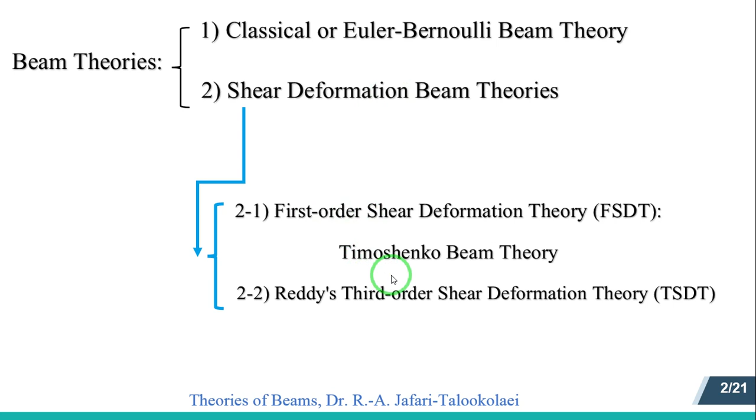Generally, one can classify beam theories into two categories. The first is classical or Euler-Bernoulli beam theory, sometimes called technical beam theory, and the second is the shear deformation theories of beams. There are several shear deformation theories of beams presented by many researchers, and in this video I'd like to talk about two well-known ones: first order shear deformation theory, FSDT, famous as the Timoshenko beam theory, and Reddy's third order shear deformation theory, TSDT. You can search the literature and find other shear deformation theories.

Let me talk about the general points in classifying beam theories. The bending effect, or bending moment effect, is a necessary part in the modeling of beams and has significant influence on the beam response, and it will never be ignored. Likewise, the transverse or vertical inertia has to be considered in the dynamic analysis of beams. In other words, the bending effect is necessary for static analysis of beams, and the bending effect along with the transverse inertia effect are necessary for dynamic and vibration analysis of beams.

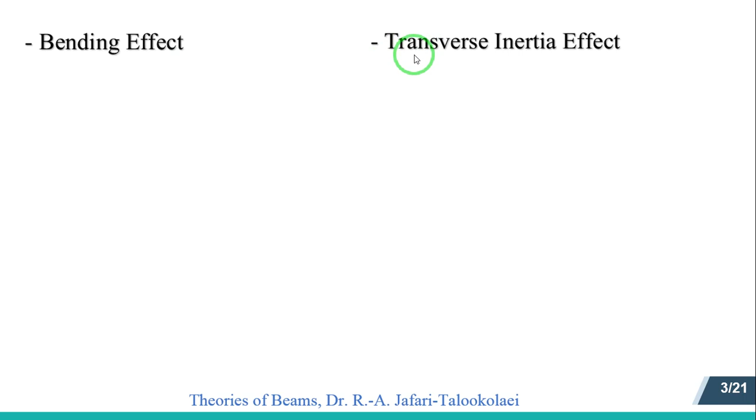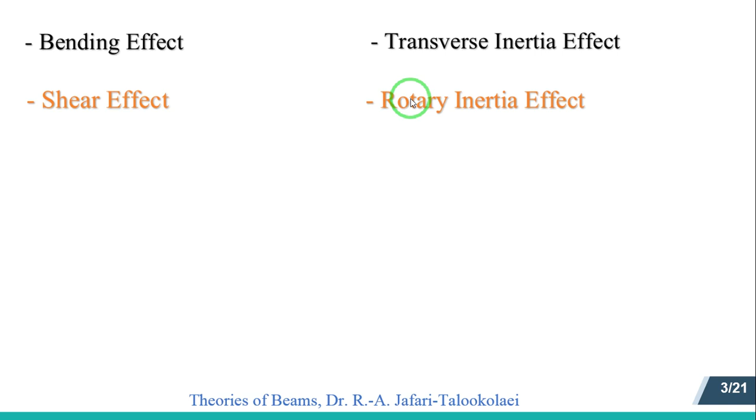There are two other effects that may have significant influence on the beam response: the shear effect, also called shear strain, shear stress, or shear force effect, and the rotary inertia effect. It can be shown that for a thin beam, meaning a beam with a high slenderness ratio L over H, the shear and rotary inertia effects are not significant and can be neglected. But for a thick beam, with a small slenderness ratio, the shear and rotary inertia effects are important and cannot be ignored.

Let me show this table. In this table, you can understand the differences between some theories of beams. In the Euler-Bernoulli beam theory, the shear effect and rotary inertia effect are ignored; only the bending effect and transverse inertia effect are considered. In the Rayleigh beam theory, only the rotary inertia effect is taken into account, and the shear effect is ignored. In the shear beam theory, the shear effect is considered, but rotary inertia is ignored. Finally, in the Timoshenko beam theory, both the shear effect and rotary inertia effect are considered in the analysis.

In the next slides, I will talk about classical or Euler-Bernoulli beam theory, first order shear deformation theory (FSDT), and Reddy's third order shear deformation theory (TSDT).

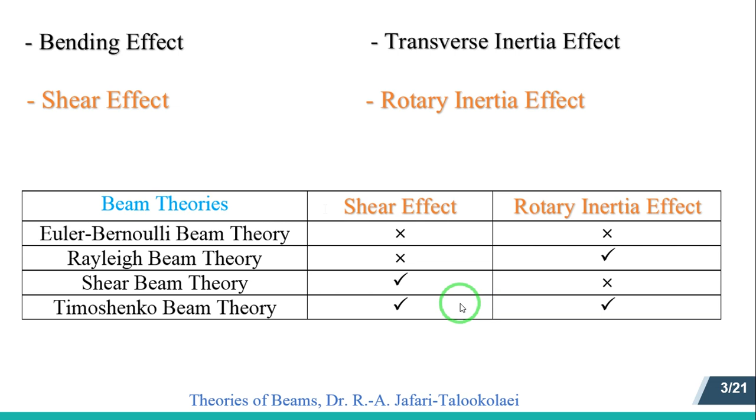In this slide, the left figure shows the beam's cross-section at an arbitrary position X before loading and deformation. The beam is placed in the XY plane in a right-handed coordinate system. The right figure depicts the beam's cross-section after loading and deformation, and the dashed dotted line signifies the midplane of the beam — shown here before deformation and here after deformation. Likewise, U0 of X and T and V0 of X and T are the displacement components of the midplane in the X and Y directions respectively.

The line OA is the tangential line to the deformed midplane, and OB is the line of the cross section. The partial derivative of V0 with respect to x is the slope of line OA to the deformed midplane.

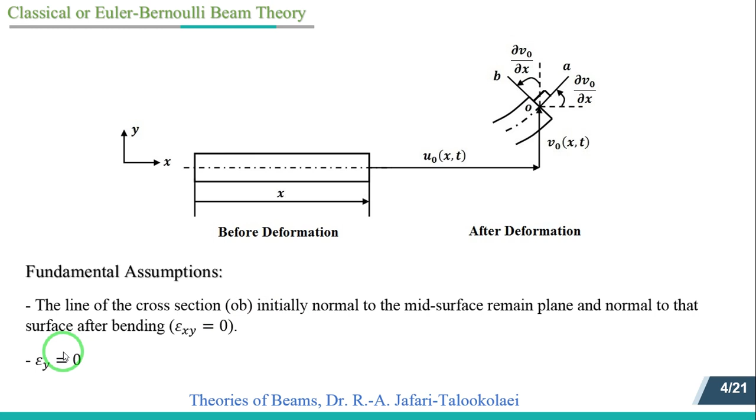The classical beam theory is based on some fundamental assumptions. One assumption is that the line of the cross section OB, initially normal or perpendicular to the mid surface, remains plane or straight and normal to that surface after bending. This assumption means that the vertical shear strain epsilon xy is negligible, which is compatible with ignoring the shear effect I emphasized before. Another assumption is that the stretching and compression of the beam in the thickness-wise direction can be neglected, meaning epsilon y equals 0.

The displacement field for the Euler-Bernoulli beam can be written as equation 1. In this equation, u of x, y, z, and t, v of x, y, z, and t, and w of x, y, z, and t are displacement components of an arbitrary point of the beam in the x, y, and z directions respectively. As you can see, it is usual to write the displacement fields based on the displacement components of the midplane, that is u0 and v0 in our problem.

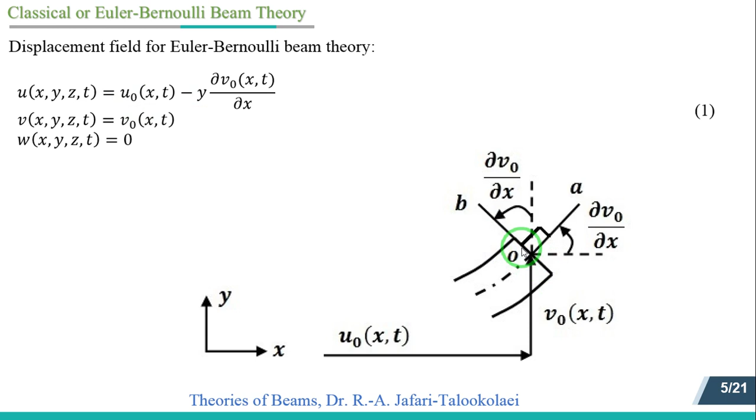Let me explain how to write this equation. Imagine a point above the midplane, a point with positive y. If you want to write its displacement in the x direction, for example, you can write it with respect to the midplane. So its displacement equals the midplane displacement, the first term on the right hand side of the first equation.

So you can say that its displacement equals midplane displacement plus the relative displacement between that point and midplane, both in the x direction. As can be seen, since the relative displacement is to the left, the minus of it is considered in the first equation, as you can see.

The second term of the displacement field, v equals v0, is obtained based on the second assumption shown in the previous slide, in which we say that the stretching and compression of the beam in the thickness-wise direction can be neglected. In other words, epsilon y equals 0.

And about the third term of the displacement field, w, one can understand that the displacement of the beam in the outward direction, the z direction, is neglected.

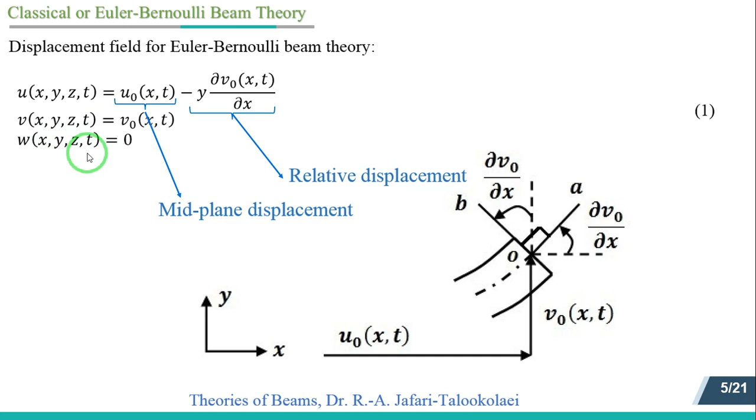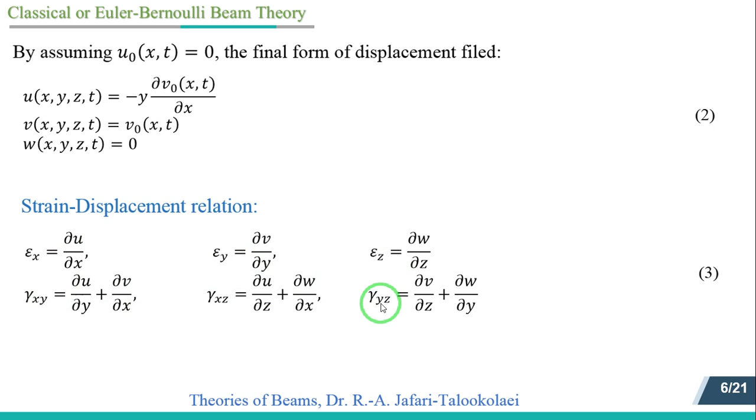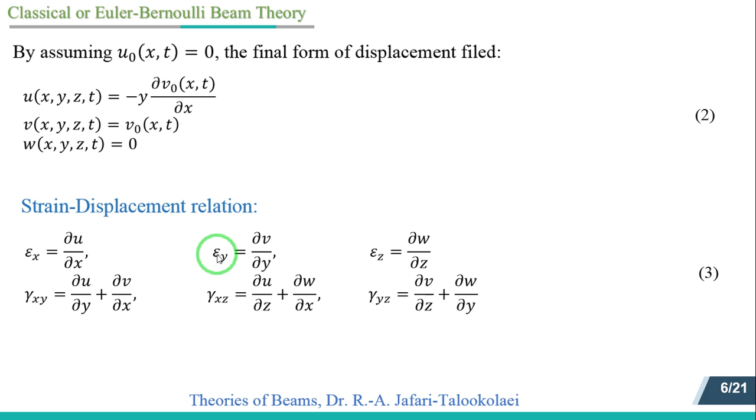In this equation, epsilon x, epsilon y, and epsilon z are the normal strains, and gamma xy, gamma xz, and gamma yz are shear strains. As can be seen, for instance, epsilon x equals the first partial derivative of u with respect to x. Similar expressions are presented for other strain components.

Upon substitution of the displacement field in the well-known strain displacement relation, we have equation 4 for all strain components. As can be seen, only epsilon x is non-zero and other components of strains are zero.

As can be seen, epsilon x equals minus y multiplied by the second derivative of v0 with respect to x.

Also, all three shear strain components are zero, but gamma xy equals zero signifies the ignoring of the shear effect in the Euler-Bernoulli beam theory. It is so important, so please keep it in mind.

The non-zero stress component is sigma x and can be calculated as equation 5, in which E is the elastic or Young modulus.

As you can understand, until now only the bending effect has been considered and the shear effect has been ignored in our analysis. Let me next present the strain potential energy of the beam by considering the linear elastic material.

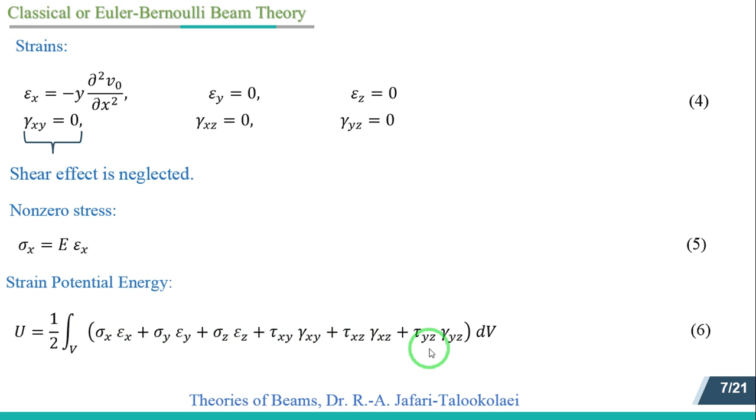The general form of strain potential energy of a structure can be calculated as equation 6. In this equation, sigma x, sigma y, and sigma z are normal stresses, and tau xy, tau xz, and tau yz are shear stresses. After substituting equations 4 and 5 in equation 6, we have equation 7.

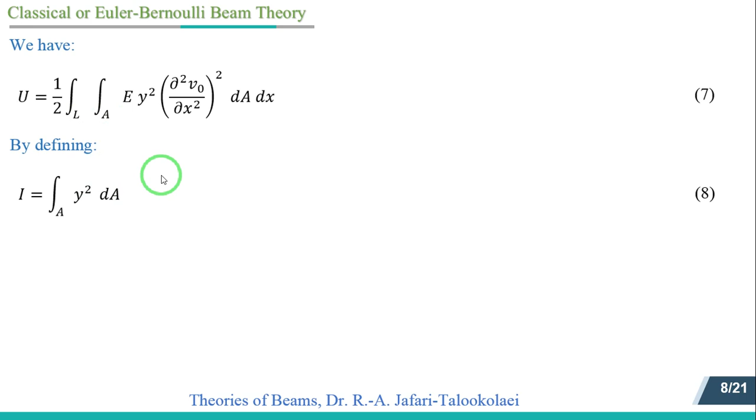In equation 7, L is the beam's length and A is the area of its cross section. By defining this integral, equation 8, which is the second moment of the area along the z-axis, the final form of the strain potential energy can be calculated as equation 9. You are familiar with this equation from elementary subjects like strength of materials.

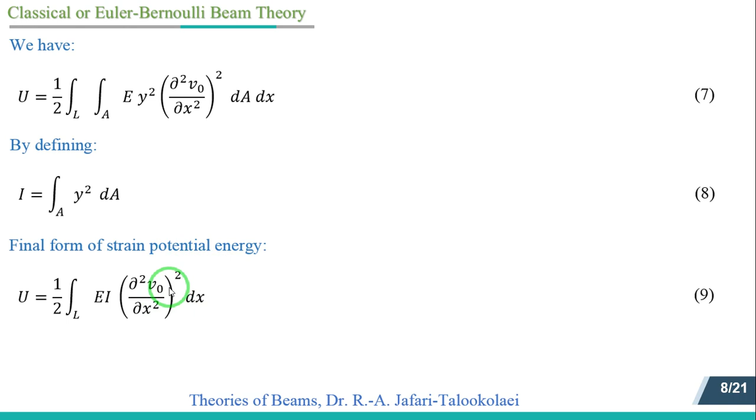Now let me talk about inertia terms. We can say that the general form of the kinetic energy is as equation 10, in which rho is the density of the beam. Likewise, u dot, v dot, and w dot are the velocity components of an arbitrary point of the beam.

It is clear that dot means derivative with respect to time, and V is for the volume, so the integration should be done through the volume of the beam. Upon substituting the displacement field, equation 2, in the kinetic energy equation 10, we have equation 11 for the kinetic energy of the beam.

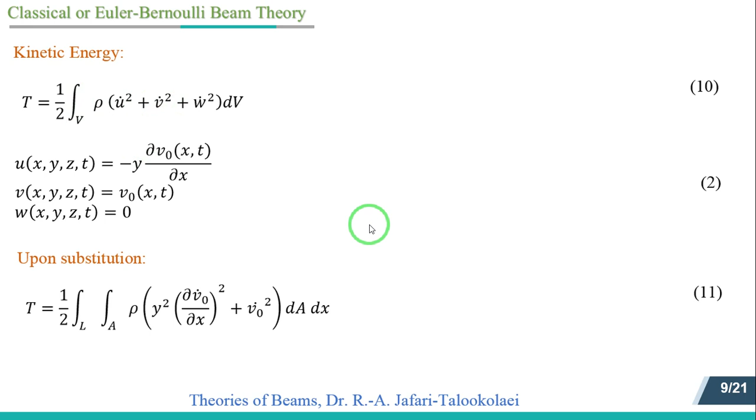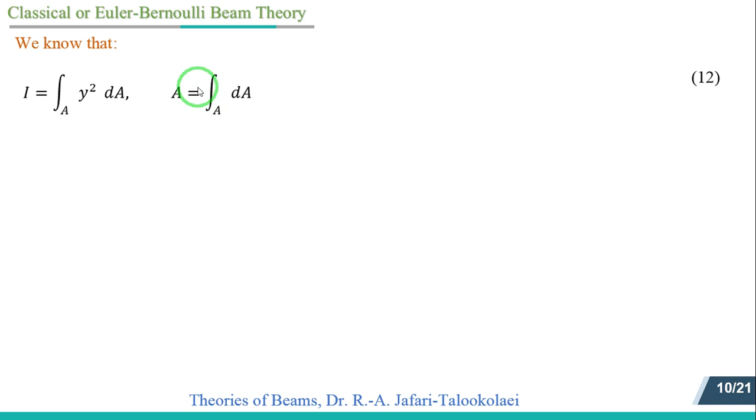Using the definition of I, the second moment of area, and also A for the area given in equation 12, we have equation 13 for the kinetic energy.

We can say that the first term on the right hand side of equation 13 represents the rotary inertia term, and the second term represents the vertical inertia. As I said before, the rotary inertia term is ignored in the classical beam theory, so the final form of the kinetic energy is as equation 14.

Having in hand the final form of kinetic energy, equation 14, and the strain potential energy equation 9, and by calculating the work done by external force and then applying Hamilton's principle, one can obtain the governing differential equation for the beam. I have to say that this is not the object of this video, so I leave it for another time.

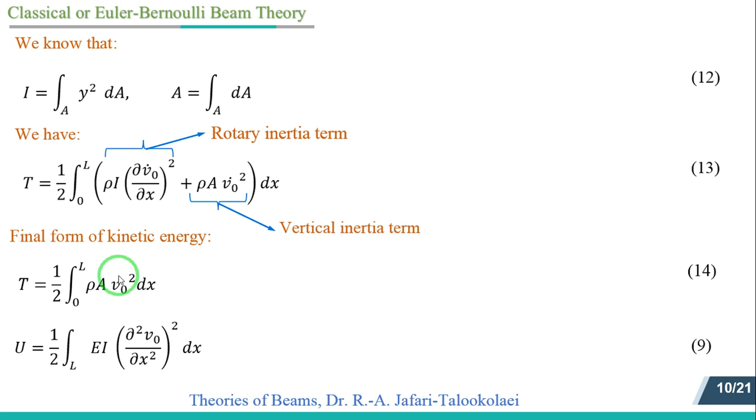From this slide, I will talk about the first order shear deformation theory, FSDT, or as I said before, Timoshenko beam theory. In Timoshenko beam theory, both effects, bending effect and shear effect, have to be considered together. You can use the superposition principle.

A simple statement of the superposition principle is that if there is a linear relation between input and output, we can apply the inputs one by one and then obtain the corresponding output, and finally the total output will be the sum of all outputs. This principle is valid only for a linear system. In our system, it is clear that there is a linear relation between inputs, I mean bending moment and shear force, and output, I mean beam's deformation. So we can use the superposition principle.

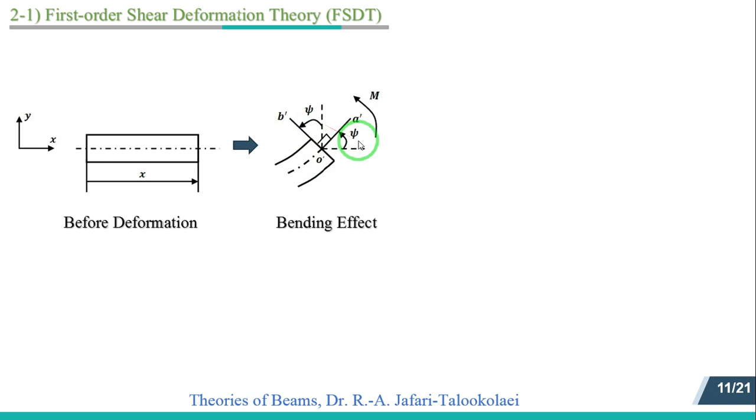This figure is for an arbitrary cross-section of the beam at distance x before deformation, and the dash dotted line is for the midplane. First, we only consider the bending moment, so this case is similar to that discussed in the Euler-Bernoulli beam theory. M denotes the bending moment of the cross-section. O prime B prime is the line of the cross-section, and O prime A prime is the tangential line to the deformed midplane, and psi is its slope due to the bending moment, so it is called bending rotation. As you can see, O prime A prime is perpendicular to O prime B prime because we consider only the bending effect, as we had in the Euler-Bernoulli beam theory.

In this figure, only the shear effect is considered. As before, O double prime B double prime is the line of the cross section, and O double prime A double prime is the tangential line to the deformed midplane, and beta is its slope due to the shear force, so it is called shear angle, and V is the shear force. We will show that the shear angle represents the shear strain, but with a minus sign because of the defined coordinate system. Please note that the line O double prime B double prime remains vertical when the cross section is deformed only due to the shear force, as shown in this figure.

Using the superposition principle, the final deformation of the cross section will be shown in this figure. From superposition, it is clear that the lines OA and OB are not perpendicular to each other in this theory. Likewise, the slope of the line OA is psi minus beta, which equals the partial derivative of V0 with respect to x.

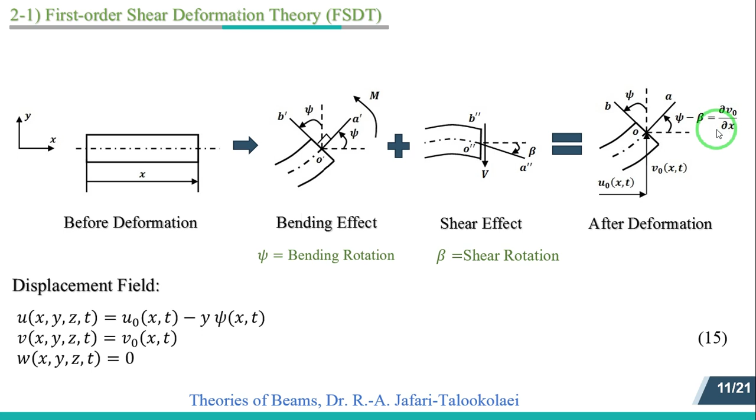Similar to the points mentioned in the Euler-Bernoulli beam theory, the displacement field for the Timoshenko beam theory is given as equation 15. You can see the displacement field here again.

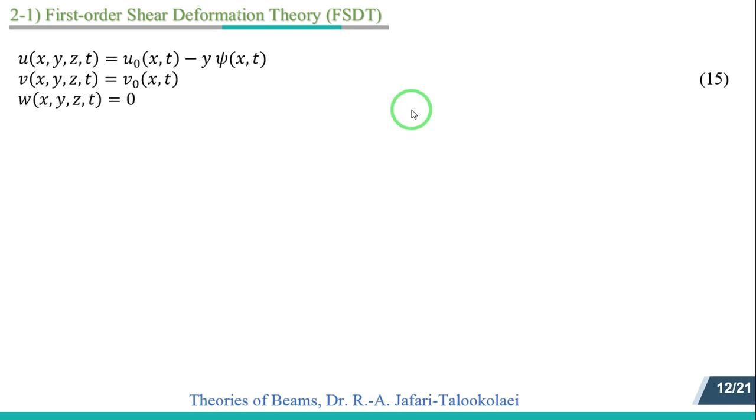You may ask why Timoshenko beam theory is called first order shear deformation theory, FSDT. To answer this question, I prefer to remind you of the Taylor series. You know that the Taylor series of a function f of y that is infinitely differentiable at point A is the power series like this equation.

F of y equals f evaluated at A, plus the first derivative of f evaluated at A over 1 factorial multiplied by y minus a, plus the second derivative of f evaluated again at a over 2 factorial times y minus a squared, plus the third derivative of f with respect to y evaluated again at a over 3 factorial times y minus a cubed, and so forth.

We can use the Taylor series to expand the first term of equation 15 like this. As you see, u of x, y, z, and t equals u evaluated at y equals 0, I mean evaluated at midplane, plus the first derivative of u with respect to y evaluated at y equals 0 over 1 factorial multiplied by y minus 0. By comparing this equation and equation 15, it is clear that the first term on the right hand side is replaced by u0, and the second term is replaced by minus y times psi.

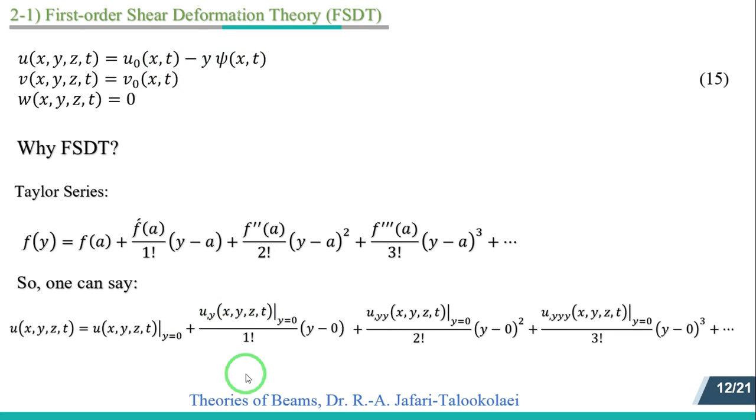By ignoring the u0 in equation 15, we can write the final form of the displacement field for the FSDT as presented in equation 16. And if we obtain the strain components using the strain-displacement relations presented before, they will be as in equation 17, as can be seen. The epsilon x and gamma xy are the non-zero strain components, and other strain components are zero.

As I said before, gamma xy is equal to minus beta. Please see here the shear angle, I mean beta, the shear angle. Likewise, I should say that if we assume psi equals the partial derivative of v0 with respect to x, these strain terms and also the displacement field in equation 16 will be reduced to those obtained in the Euler-Bernoulli beam theory.

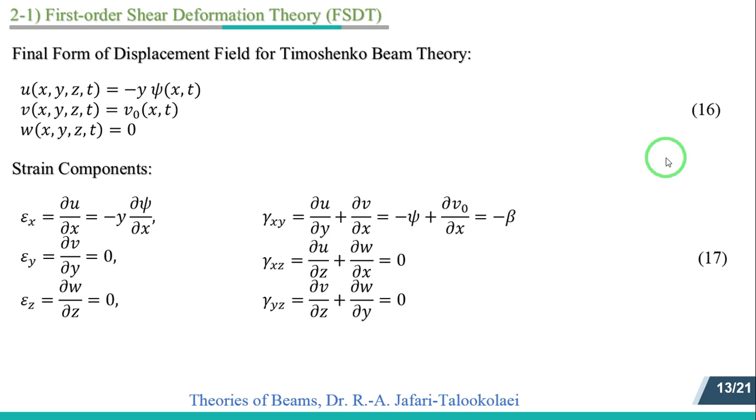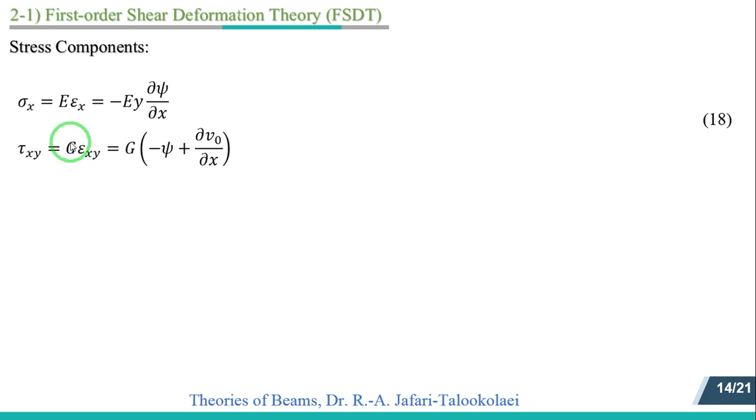By ignoring the Poisson effect, the non-zero stress components will be the normal stress sigma x and shear stress tau xy, in which G is the shear modulus. The main critique of the Timoshenko theory is that it predicts a constant value for shear stress and shear strain at an arbitrary position x, but from elementary strength of materials, for example for a rectangular cross-section of the beam, the shear stress distribution will be parabolic.

To correct this inconsistency and get better results, for example for deflection, the shear correction factor is multiplied as in equation 19. By multiplying the correction factor Ks, the shear correction factor, the shear stress and shear strain distribution isn't truly corrected, but generally the results will be better.

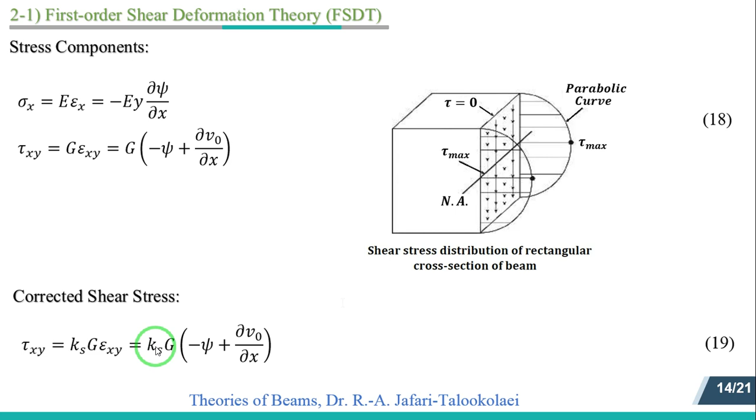If you want to calculate the strain potential energy, it will be obtained as equation 20. It is clear that the first term in the integral is due to the bending effect, and the second term will be due to the shear effect.

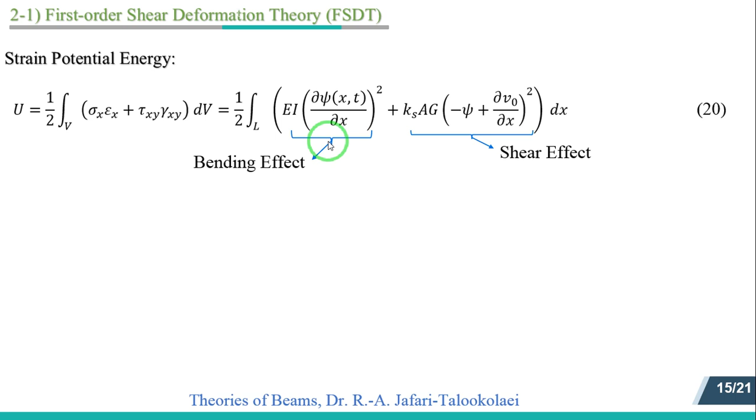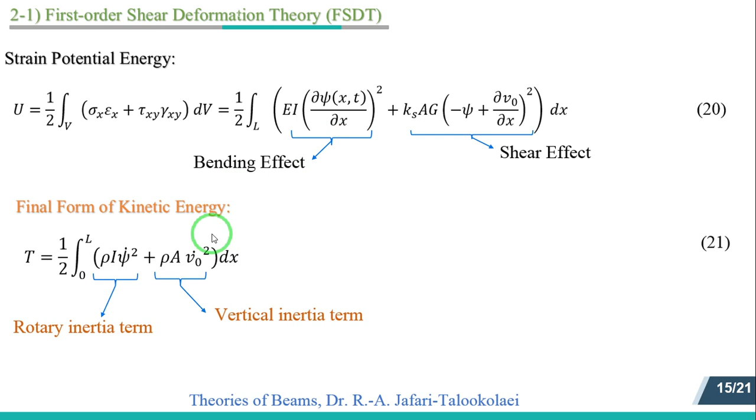Moreover, if you try to obtain the kinetic energy of the Timoshenko beam theory, its final form will be as equation 21, in which the first and second terms represent the rotary inertia and the vertical inertia effects respectively.

The last theory we discuss in this video is Reddy's third order shear deformation theory, presented by Professor Reddy. As explained for the Timoshenko beam theory, using the Taylor series, we can write the displacement field until the third order for u of x, y, z, and t in Reddy's third order shear deformation theory.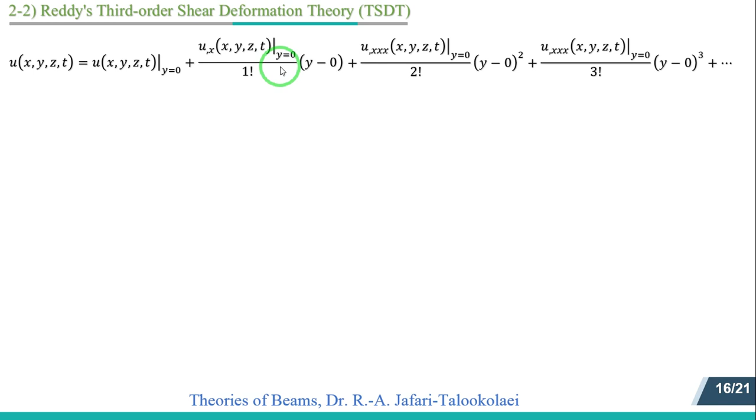As you see in equation 22, u of x, y, z, and t equals u0 minus y times psi plus y squared times phi of x and t plus y cubed multiplied by omega of x and t. V of x, y, z, and t, and W of x, y, z, and t are the same as before. Using this figure...

It is easy to understand that the transverse shear stress is zero at the top and bottom of the cross section. You can see here, at y equals h over 2 and also y equals minus h over 2, the shear stress is 0.

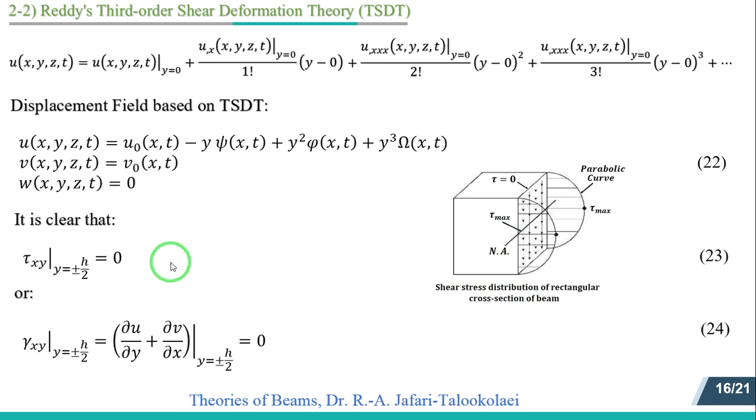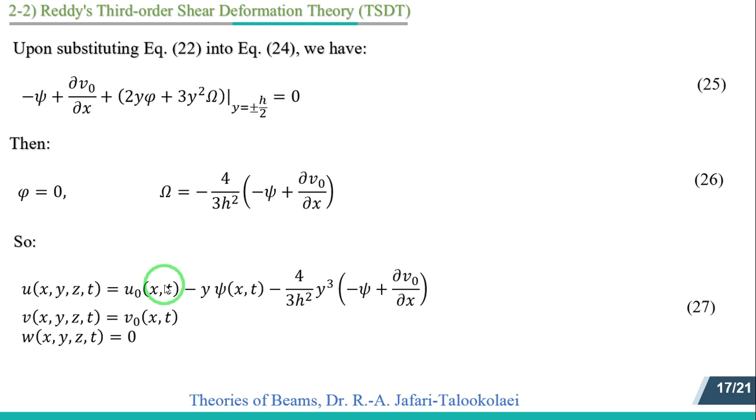From the stress-strain relation, we can write equation 24. Upon substituting equation 22 into equation 24, we have equation 25. The results presented in equation 26 can be easily obtained from equation 25, and so the displacement field for this theory can be written as equation 27, as you can see here. This is the final form of displacement field for the third order shear deformation theory.

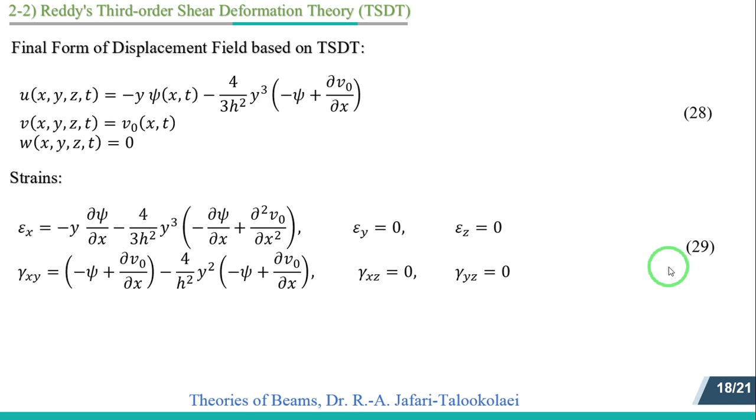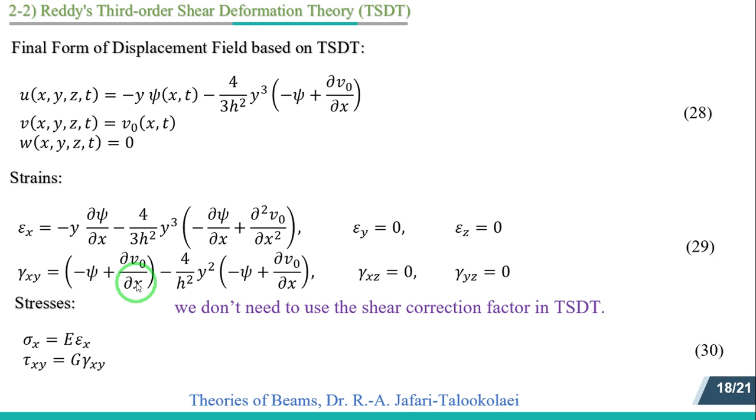The same as before, we can ignore u0 in equation 27, and so the final equation for the displacement field of this theory can be obtained as equation 28. The strains and stress components will be obtained as equations 29 and 30 respectively. The main point is in the shear strain gamma xy. It is clear that the shear strain almost gives the true distribution, and so in this theory we don't need to use the shear correction factor which was used in the Timoshenko beam theory.

Having in hand the stress and strain components, the strain potential energy can be calculated. Likewise, using the final form of displacement field for TSDT, equation 28 as you can see here, the kinetic energy can be obtained. I leave the calculation of these energies for you, and I'm sure that using the previous slides it is easy for you to calculate the strain potential and kinetic energies.

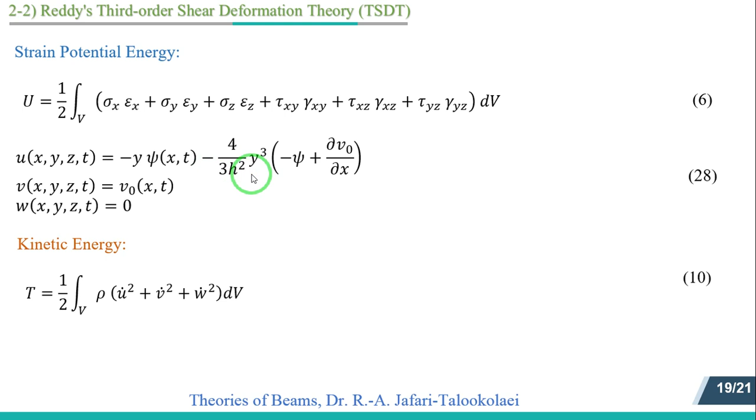Finally, I would like to say some points. First, OA and OB are perpendicular to each other in the Euler-Bernoulli beam theory, but they are not perpendicular in the shear deformation theories, due to considering the shear effect.

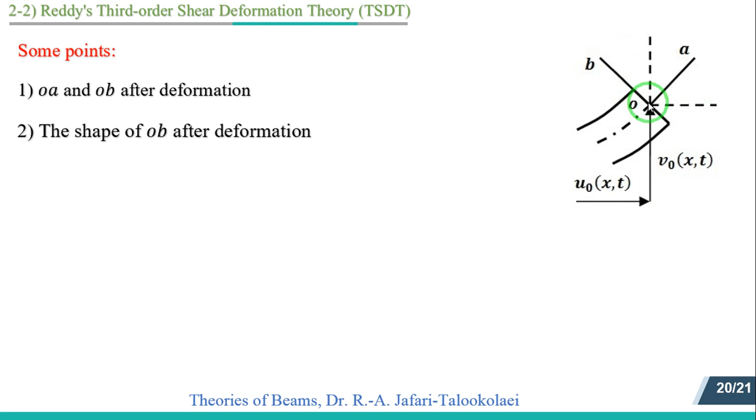The second point is about the shape of line OB after deformation. Referring to the displacement fields for different theories discussed in this video, we can say that line OB remains flat after deformation in the Euler-Bernoulli beam theory and also in the Timoshenko beam theory, but in the third order shear deformation theory it is not flat and will be a curve.

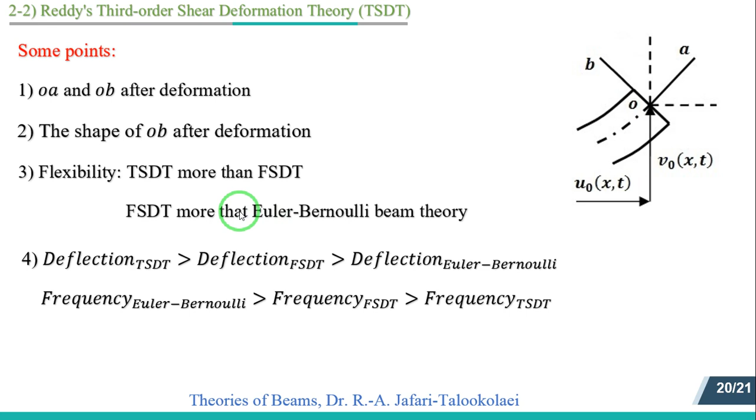The third point is that TSDT predicts more flexibility for beams than the Timoshenko beam theory, and the Timoshenko beam theory predicts more flexibility than the Euler-Bernoulli theory. In other words, the overall stiffness of the Euler-Bernoulli beam theory is greater than the Timoshenko theory, and the overall stiffness of the Timoshenko theory is greater than the TSDT. From this, we can say that deflection of the beam based on the TSDT is the biggest one, and the frequency predicted by the Euler-Bernoulli theory is the biggest one.